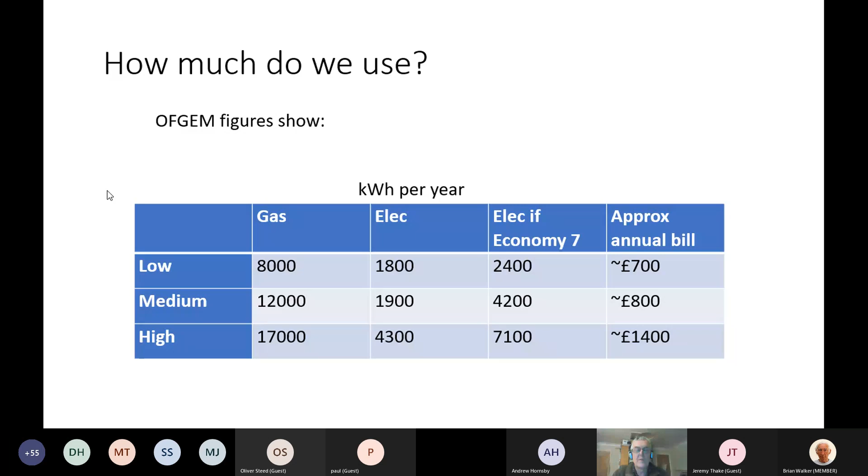Two things I want to say about this. One is that the gas kilowatt hour use is considerably more than the electricity use. And in the context of the current electricity supply and the generation mix we have in the UK, gas is also by far the more significant source of CO2. Because what has actually happened in my career in this sector is that the electricity generation mix has massively reduced the amount of CO2 emitted from electricity generation. So what that says is that if we're looking in the context of energy use and carbon, then it's about the gas use.

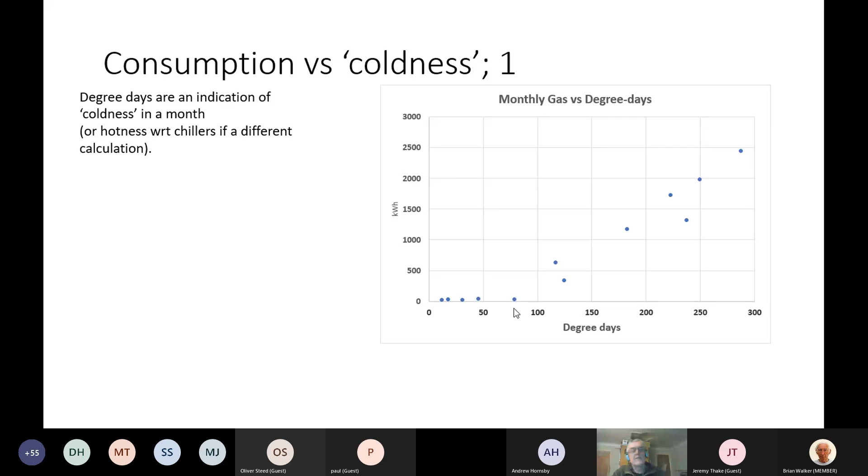So that hopefully will become more clear if I talk about what a degree day is. So this is how you calculate them, is the best way to explain it, I think. So step one, you choose a reference outside temperature. So what is outside your house, and typically we use a weather station number rather than necessarily recording the value directly outside the house. And the reference temperature is essentially the equilibrium temperature at which you don't need to heat the property. And for the UK, that's typically taken as 15.5 degrees centigrade.

So you take that reference, and then for every hour, you calculate the delta between that reference and the actual temperature. So, for example, if you're looking at heating degree days and it was 13.5 degrees outside, compared to your reference, you've now got 2. It being colder, so you record that 2, and then you go through all the hours in that period you're looking at, and you add up those degrees. And then, of course, what you've got immediately is degree hours, but then, with the relevant maths, simply dividing by hours or days, you can produce degree days for the day, the week, the month, or the year.

Now, that 15.5 degrees centigrade number is a good starting point as a reference, but actually it will probably vary according to how well insulated the house is, because if you insulate a house very well, it is isolated from the outside, and therefore it is likely to stay warmer by itself. We have in all our houses what are called incidental heat gains from, for example, when you boil the kettle, or from when you're watching the telly, or your lights are on. Even though they're low energy, there will still be a certain amount of heat going into the building. Even people and pets will produce a certain amount of heat.

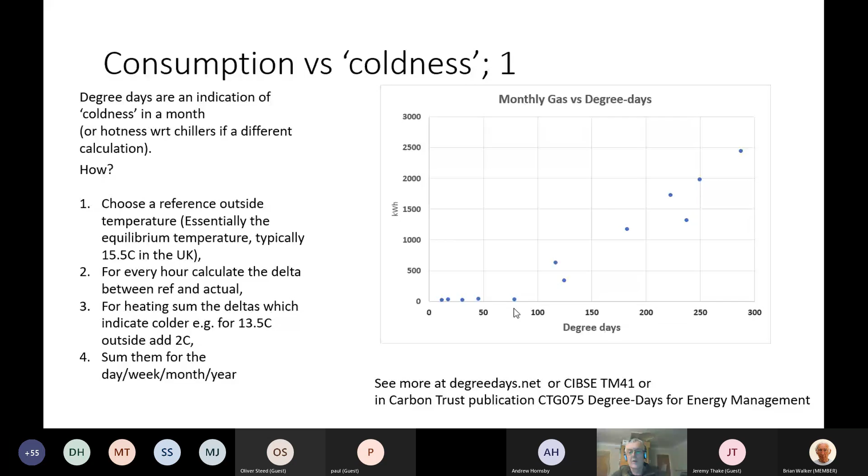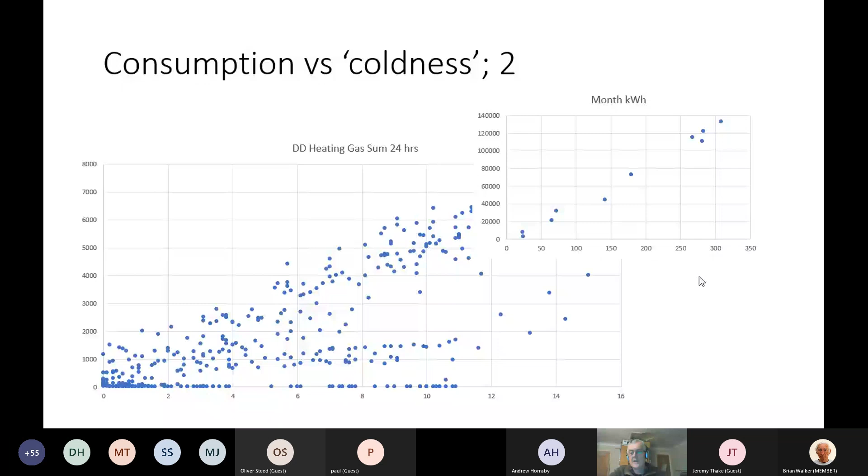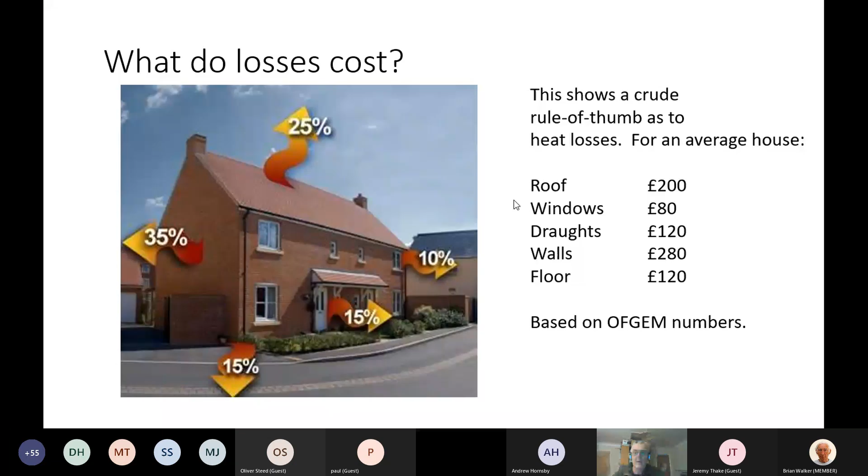So that was how much energy these houses use, and some idea of how we might analyze it and the costs. So what I now want to talk about is a bit more detail on how construction and the insulation will influence those numbers.

So to start with, I'm going to introduce this concept of U values, and many of you may know about this anyway, so apologies if this is not new to you, but it's the construction industry's shorthand for conduction. The units are watts per square meter per degree C. So what that is saying is, a watt of heating power is being lost through an element of the building for every square meter and for every delta T of a centigrade.

So it is actually a very good unit when you are designing a building to help thermal modeling and to understand how the structure could be improved. There are some shortcuts taken in it. So the U values that you get for a piece of a building are averages, regardless of, for example, wind speed.

Anyone who's worked on heat transfer as a mechanical engineer, you'll know that forced convection, so air moving at speed across a surface, removes much more heat than natural convection. And that must apply to buildings as well. So if it's a windy day, the U value must change. It must lose more heat than on a still day when it's just convective loss.

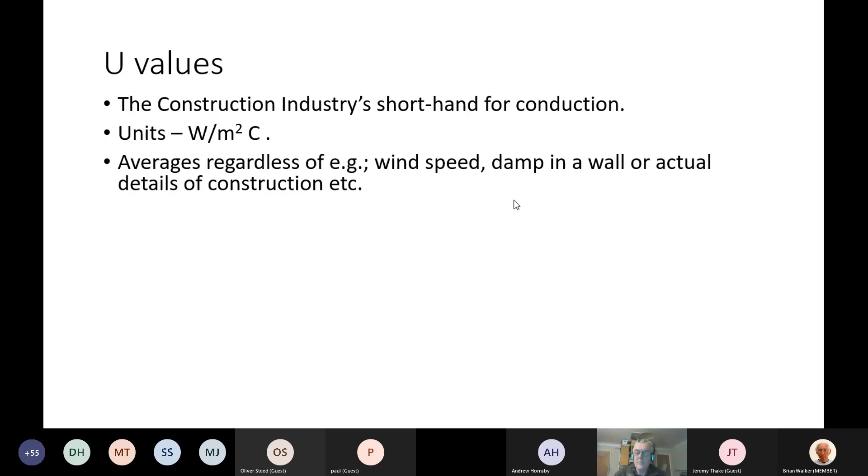So what sort of values do we get? This table is showing you, so each row is an element of the building, and you'll see on the left there I've got the wall, the floor, the roof, and a window. And then I've got a column which is the lower performance type of structure with its U value, and then a higher performance one and its U value on the right.

So if we work our way down the rows, a 4-inch brick wall, that's 4 inches thick, so that's one brick thick, and that might be something you would find in a Victorian building, the scullery, for example. A few houses just have a 4-inch brick wall. It might be that someone's converted the scullery into a utility room, and that's the thickness of the wall. So that U value is about 3 watts per square meter per centigrade.

A higher performance, right at the top end, passive house, which I'll talk about a bit later. So that's a really top end building, very high levels of insulation, very low energy use. So there we can get to 0.09, so a very substantial change. Let's see, 1/30th or better.

Then the floor, so the sort of worst case I would expect to see would be a suspended timber floor over a ventilated void, and typically again that might be Victorian, but we do see those even in houses up to about the 1960s, and there we're losing 1.5 watts per square meter centigrade. But a modern floor, which would typically be solid, but it can be a modern variation on suspended, which we call beam and block, you have insulation both around the perimeter and underneath it, and there your U value is 0.1, so again very substantially lower.

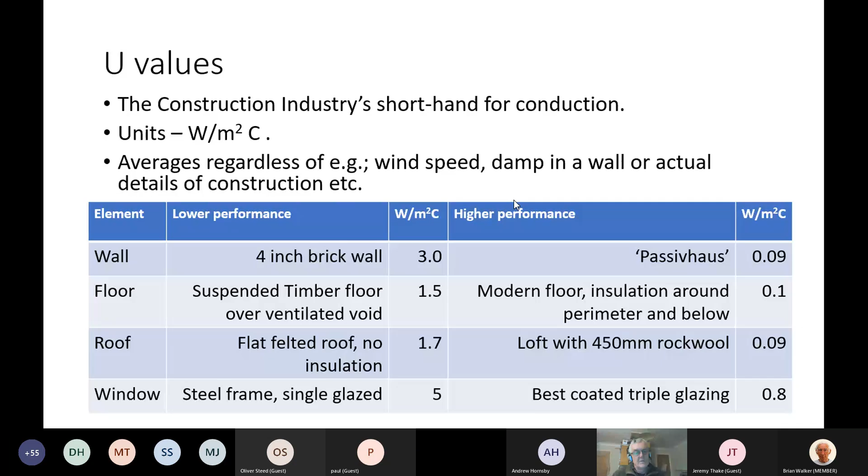The next question then is how might that build up to how a building is actually losing heat? Oh, sorry, before I do that, I've got one more element of heat loss, which I nearly forgot. Ventilation.

When cold air comes into a house, it must push warm air out, and of course we have to reheat that fresh air. So we have to consider those air changes, and the reason we have them is because inside a house you have sources of moisture, whether it's just breathing or showers or boiling that kettle or whatever.

We also have some pollutants from cooking. There are plastics in our house. If you have a new carpet, there's that new carpet smell, which is actually VOCs, and of course we have CO2 from people. If you didn't ventilate that, then the air quality inside the house would become unacceptable.

So as an indication, 1 air change per hour is about what we need to maintain a healthy environment. Slight caveat again, it will depend on how many people are in the building, what is going on, and how big a volume of air there is in a building, but that's a good indication. So as I say, we need to heat the air to maintain comfort.

And as an indication, if we had a 10 meter by 7.5 meter floor plan on a building and two stories, so 4.8 meters tall, that volume with a delta T of 15 centigrade, so 5 degrees centigrade air coming in, but we wanted 20, you need about 1.5 kilowatts continuously to keep that air up to temperature.

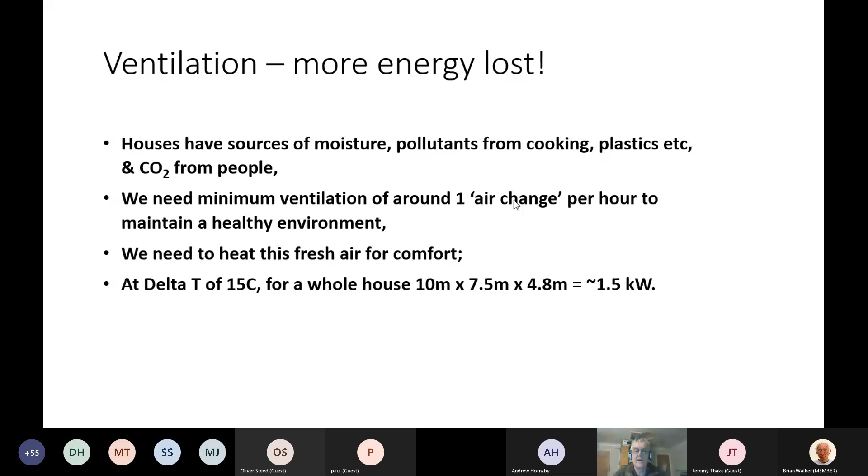So now I'll build that up into a typical house. And here we're building it up similar looking to the U value, but it's watts per centigrade, because now we've multiplied up by area. So this is telling us the sort of specific heat loss for a building. I've used that 75 square meter floor plan as an example, and this is considered the sort of nominal small average house in the UK.

So the fabric conduction losses, so we take all those U values, the U values of the windows, the walls, the floor, and so on. For each element, we multiply by the area, and then we get the totaled up watts per centigrade. For the air changes, we take the volume and the specific heat of air and the flow rate and so on, and then we get another number. Coincidentally, these are very similar. And then we total them up. Total specific heat loss for this building is 116 or so watts per centigrade.

And now you can see for 2 different delta T's, so one at 12 degrees centigrade, so if it was 6 degrees outside and 18 inside, we have 1.4 kilowatts required to keep the house comfortable at that 18. And if the delta T is 23 centigrade, so now we've got a frosty day outside and someone wants it at 22 inside, then we need 2.7 kilowatts.

To me, 2 things jump out straight away. One is that, of course, delta T is important, which is why, and hopefully this is no surprise, if you set your thermostat down a bit, you will save energy because you're reducing your delta T.

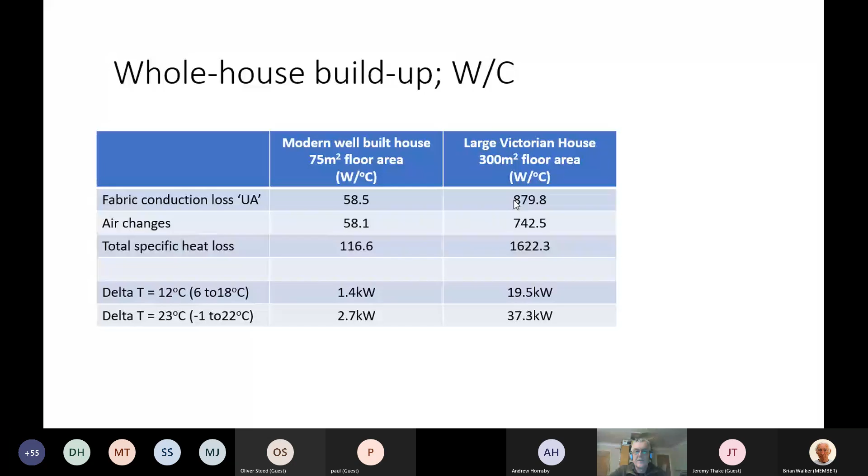Now, there's another way of looking at the sort of specific heat loss. So I'm now going to look at how those older building fabrics and older U values have changed and have improved and are going to improve in future. This is another industry convention where we're looking at watts per meter square of floor area. As an engineer, it makes me wince, but this is what the construction industry uses.

The particular problem with this is that per square meter of floor area doesn't differentiate between, say, a bungalow and a 2-story or even a 3-story building, when the surface area to volume ratio will change dramatically. But it is used as a comparison. There's a certain amount of benefit in using it.

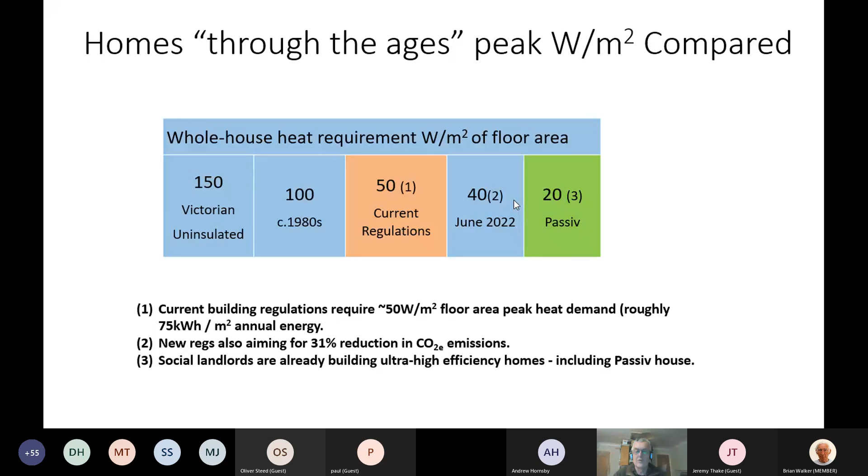So let's talk a little bit more about what are passive houses. I've got some photographs here, and then the bullets about what the specifics are. So first of all, they do have very high levels of insulation, and that simply means very thick insulation. And on the bottom photograph, I don't know how easily you can see on your screens, but it's just visible here how deep the reveal where the window is fitted is. And I know this particular house had 300 millimeters of a foam insulation on the outside of a heavy concrete structure.

The other thing that is done to passive houses is they are very airtight. And what that means is you have to have active ventilation, and that active ventilation will have a heat recovery system in it, so that as the warm air in winter is blown out to maintain freshness of the air inside, you bring in cool air, you pass it through a heat exchanger, and you swap as much of the heat as you can. And a good unit, well installed and operating at its correct settings, should achieve over 90% of heat recovery in an active ventilation system. The other thing you should have in a passive house is good thermal mass.

I mentioned the one at the bottom has a concrete structure as its internal surfaces. And the point about that good thermal mass is that it modulates and moderates temperature changes. The summer heat, for example, as the temperature outside rises, the house will gently absorb that heat. It won't suffer from overheating on a really hot day. The thermal mass will slowly absorb that heat.

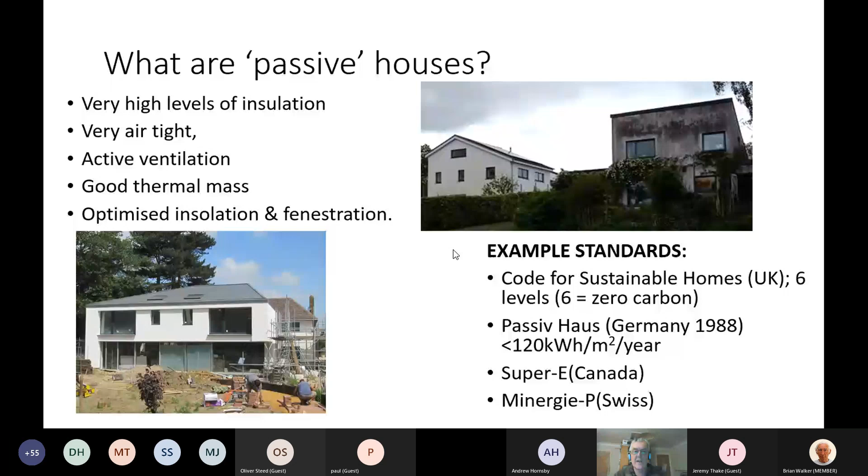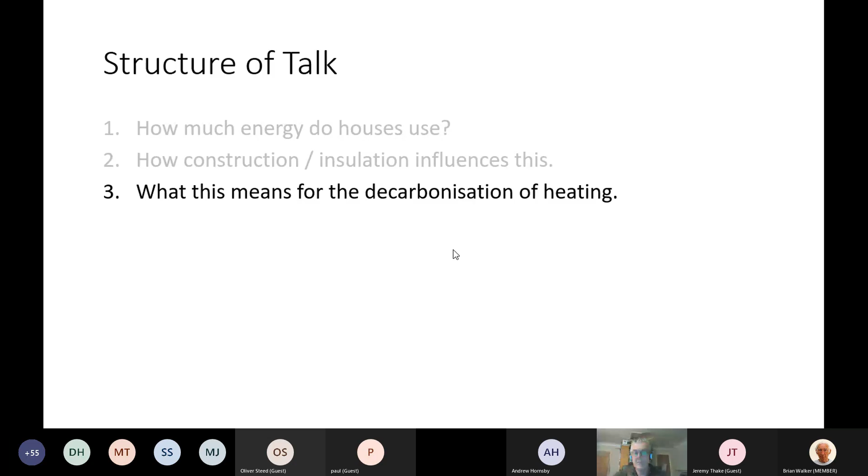So we looked at how much energy existing buildings use. We've looked at how we might change that by improving insulation. So the question I want to now talk about is, what does this mean for decarbonising heating? So let's look at what we currently use for heating, which is the red one, gas boiler. Why would we use it? Here's the pros in the next column.

Well, obviously, very high temperature output, which does two things for you. It means you can have quite small radiators, and it means you have a very fast warm-up. Suits conventional designs of houses. It suits a lot of modern living for people who may not be in the house during the day, and it's convenient. We're used to it. The other point, of course, is that the gas invisibly and magically just comes through a pipe into our houses, and we don't have to think about where the fuel is coming from. It just exists.

Then there's biomass. Similarly has high temperature output, which also means you can have small radiators and a fast warm-up. It is CO2 neutral if the fuel is sourced in the right way, so we've got a definite step change in how we might heat buildings. Then we have heat pumps. These are extremely efficient. For about a kilowatt of input, you will typically get 3 to 4 kilowatts of heat output. And this is why there is so much interest in them, and indeed there has been for many years in other countries.

An air source heat pump will typically give you 3 kilowatts out for 1 kilowatt in, and a ground source heat pump will give you 4 kilowatts out for a kilowatt in. There are some very robust and reliable designs out there. And of course, if we're using renewable or certainly low carbon electricity, then we get an extra boost of extremely low carbon heat, because the heat source for the pumps is the natural warmth around us. So an air source heat pump extracts it from the atmosphere. A ground source heat pump, as it says, extracts it from the ground.

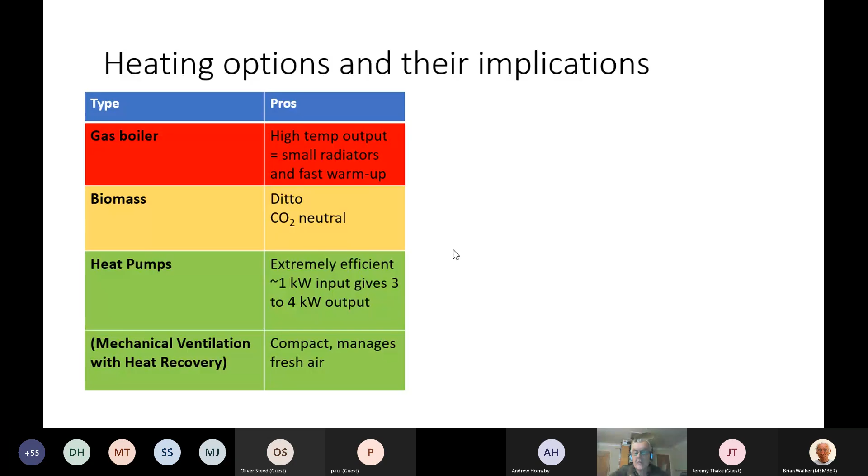So what are the disadvantages? Well, gas boiler, CO2 emissions, and of course UK sourced natural gas is declining, and that is partly why we are exposed to this ridiculous spike in gas prices at the moment. We are no longer a net exporter of gas.

Biomass, well, there are two problems really with this. One is the lack of scale of the fuel resources in the UK. We just don't have enough waste wood and other materials that could be used. And then the other big issue is transport. I think it would be unthinkable actually to try to supply some of London using biomass, because the amount of fuel you'd have to transport is colossal. Indeed, it's quite an eye-opener.

Some of the clients I've worked for who are building new low-carbon houses or retrofitting biomass to their houses where they've had oil before, it's an eye-opener to understand just what volume of biomass you need, especially if you've converted from gas, where you didn't have to think about where the fuel was coming from, and suddenly you've now got, say, 4 cubic meters of storage, and that isn't your whole fuel consumption for the year. So the transport of that would be quite difficult.

So, difficulty with heat pumps, then, moving down. They are electrically powered. Well, that in itself isn't a difficulty, but in the UK, that means we will need much more electricity generation to flip from using gas for heating to heat pumps for heating. And also, if we don't get this right, we might need grid reinforcement, because the power rating of some heat pumps will be so high that it might just put too much demand on the grid.

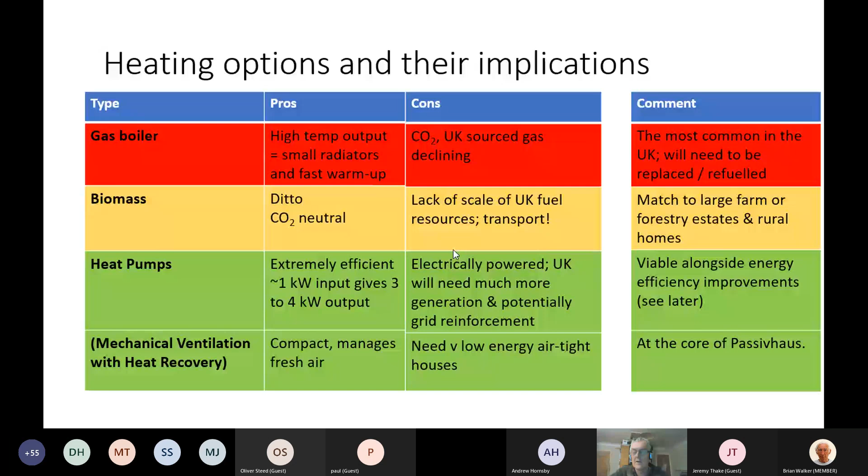Heat pumps, where do they fit, and where might these other technologies work? I'll try to explain. This is where it does get quite complicated. So here I'm trying to compare the kilowatt peak heat requirement of homes and to see whether they might be what I'm calling heat pump ready. So this chart tries to illustrate how the peak heating demand, and that's essentially the rating of your heating system, how that varies depending on the size and the insulation levels of the building.

So down the bottom here, this is the insulation quality, if you like, of a building. This level is the uninsulated, the old Victorian rectory again, that's getting such a bad press at the moment. And at this side we've got the passive house level, and in between we've got the different stages of improvement in building regulations.

And then as we go upward, we'll see these lines are telling us where the thresholds of the floor areas are. So this is your middling small house. Here's a bigger property, and there again is our much maligned Victorian rectory.

And what we have in here, these 3 bands, are different qualities, if you like, of the amount of heat. So down here in our very small or certainly passive house insulated levels, we have no heating required. So even here, even older buildings, if it's an older apartment, it might be small enough that you could just retrofit a heat pump.

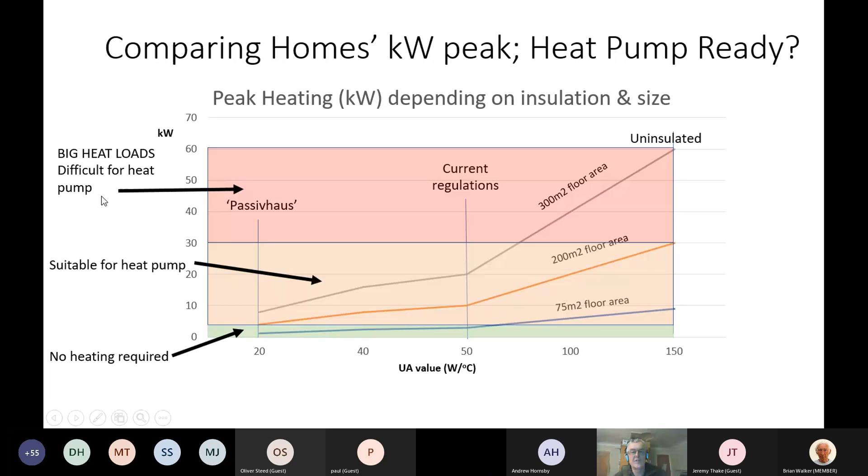So what are the implications for new build houses if we're looking at heat pumps? And I think they are an opportunity for heat pumps. So first of all, very simply, U values should be much better. The air tightness should be much better, and then we fit mechanical ventilation with heat recovery. There are techniques for testing buildings as they're constructed to make sure that they are made airtight, and there are levels which can be certified at which there's no problem with a mechanical ventilation with heat recovery.

I would say we need to go ultra low energy, such as passive house, and I've already said there are some, certainly self-builders, but also some registered social landlords are building at passive house level. So it's not impossible by any means, and it's proving practical if social landlords are doing it. The flip side is that at this point here, it's difficult to use traditional brick and block to get to such low energy levels and such good air tightness that you can realistically think of a heat pump.

It's partly because of the way the construction industry operates, but it's also partly because of the constraints on it. You're working in a field in all weathers. The work is done under time pressure. Quality is only really seen at the very final finishes with the paintwork and the final plaster levels. So to be frank, there's a lot of corners cut in brick and block.

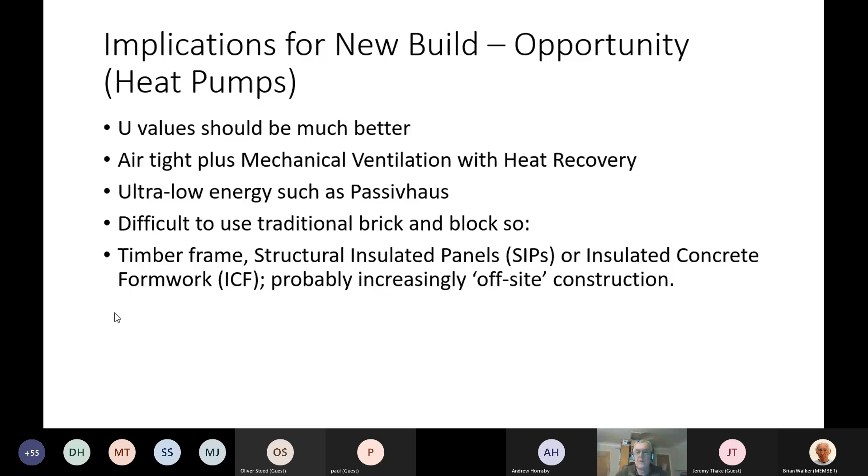And we're beginning to see a shift to off-site construction in some sectors already. The passive houses that registered social landlords are using are typically off-site construction. Some of them to the extent that they even build the whole of the ground floor, and that's in the factory, brought in on the lorry. It's already got the electrical wiring fitted and the plumbing. It's connected together as you build the second floor on top of it and so on. So quite substantial changes occurring there.

What about existing homes? There are some specifics that we would need to do. One of them, which is often overlooked, is you'd need to install an appropriate hot water tank if you're going for the heat pump solution. And the reason for that is that a heat pump produces output at a lower temperature, and indeed maybe they should be called warmth pumps. Typically the output will be about 45 centigrade, 40 to 45, and that's because of the thermodynamic cycle they're using. They retain their high efficiency by keeping the output low.

What that means is you need a different heat exchanger in the tank compared to a gas boiler. It also means you need a much bigger tank, because if you can think of how you might have a shower now, certainly from a combi boiler, you get hot water, you dilute it with cold to get the right temperature. If you've got a classic immersion tank, again, the water can be very hot. You can dilute it with cold, but not use very much of the hot tank. When your tank is only 45 centigrade, you're going to use a much larger volume of that water. So you need a bigger tank.

I don't often hear that being mentioned when we talk about heat pumps as a retrofit for existing buildings. And I think it's an area which will actually cause some confusion, and also potentially it's a barrier, because where people have a combi boiler in their houses, they don't have a hot water tank. So where are they going to put it?

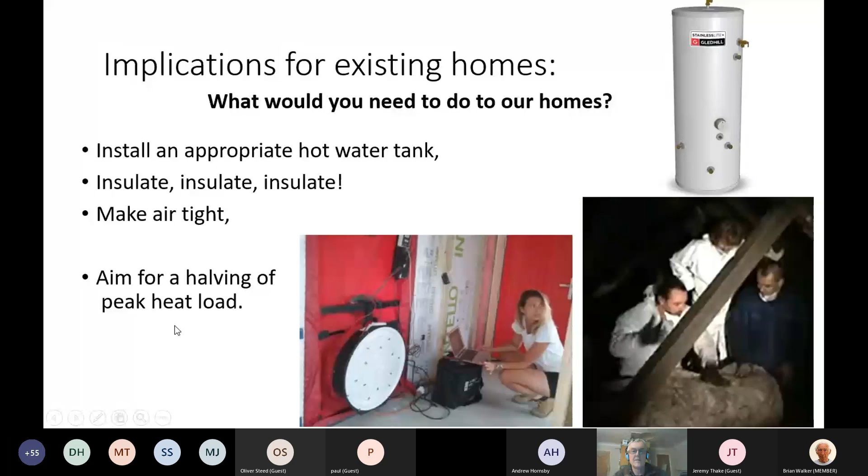And it's a very effective test in a new build, typically done twice during the construction, each time taking maybe a couple of hours, go around, find the holes, seal them up, and then return later when the next stage of construction is done. And we can get some very airtight buildings like that. And I would say for existing buildings, we should aim for roughly halving the peak heat load. I think that's a practical level to go for if you use all these various techniques.

Now, I spend quite a lot of my time talking to ordinary people, non-technical people who don't have a particular carbon target in mind, and working at the moment, in fact, for a community group in North Oxford. And something that also we should not overlook is the barriers to change. I've talked so far very much about the dry technical stuff and what can be done, but let's look at some of these barriers. This one, and I'd written this quite a while before the big increases of gas prices we've seen: high fuel bills, no spare capital. People are suffering cost of living increases. Where are they going to get the money from to do all this work?

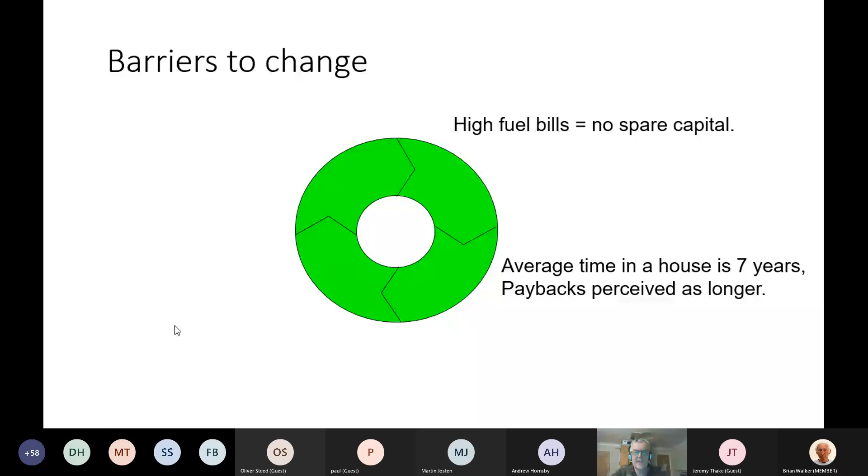The average time in a house is typically 7 years still, so the paybacks need to be less than that, but they're perceived as longer. They're not necessarily longer, but they're perceived as longer. And I think if you look at the current massive increases in energy prices, actually, if you'd done some energy efficiency work a couple of years ago, you'd be laughing, because your payback would just have been reduced by about 3 or 4 years. But they are perceived as longer. And actually, people perceive that their time in the house will be less than 7 years, and that's not always the case either, but it's a barrier.

There's a perceived lack of credible suppliers and installers, and in fact, I think there are some incredible suppliers and installers. And every now and then we get problems like Grenfell Tower, where that dreadful disaster was caused by lack of quality control in the whole process, in my view. How can you put such flammable insulating material outside a building? That has influenced the way people look at external wall insulation. There are, to be frank, deliberately mixed messages in the media from the energy industry. Why would British Gas want you to buy less gas, I ask myself, by insulating your house?

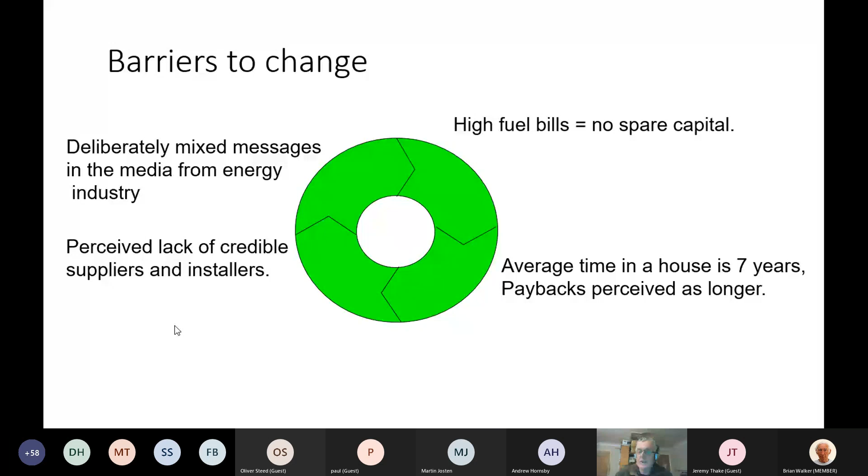Busy family life, people don't have time to think about it. It's quite complex to go through the process of finding a company to do the work. What is the work you want done? How much is it going to cost? Is it going to pay back? And so on and so on. People just don't have the time to think about it. Risk, suspicion, and doubt generally.

Inconsistent government policy, and there are many disincentives, is another one. We've had the Green Deal, which was cut about 8 years ago. It was replaced briefly by another home insulation process, which turned out to be too complicated, run by a call center based in America, and has just collapsed into nothing. We don't have a replacement. We used to have a feed-in tariff on solar PV. We used to have a renewable heat incentive on heat pumps. They've gone. These things come and go all the time, so it's very difficult for people to believe that there's going to be ongoing support.

And then there are disincentives. For example, a new build property doesn't require VAT to be paid on it, but if you're improving your home, you have to pay a lot of VAT on the materials that you're using and the work that's being done, unless you want to go through an incredibly complicated bureaucratic process. So yes, another disincentive. And then there's just general peer pressure, the sense, I think, that a lot of people would rather have a nice new car or a brand new kitchen because they feel that that's what their friends and neighbours, and that's what Facebook, would be telling them they should be doing.

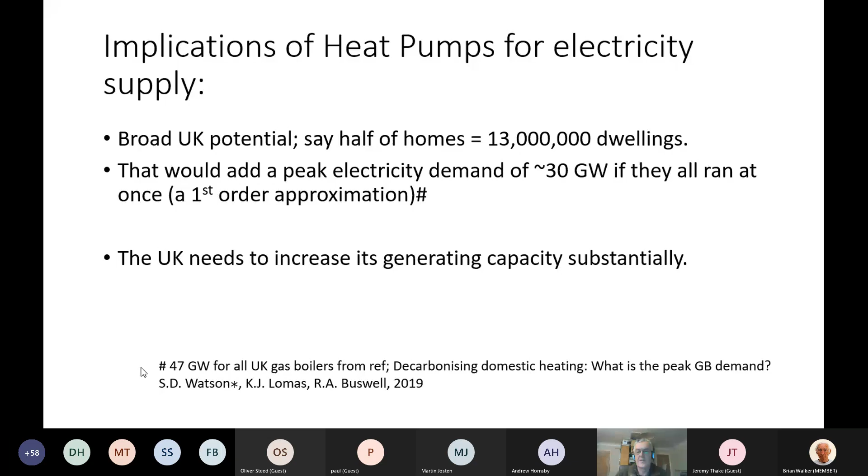So, in summary, I would say that many UK homes are heat pump ready, or can be made so by practical energy efficiency improvements, and that would give us an instant decarbonisation.

If you did just the energy efficiency improvements, say halving the heat loss, then that reduces primary energy consumption by about 50%. Using the heat pumps, and remember that you put a kilowatt in and you get 3 kilowatts out for an air source, or better for a ground source. So that means that we will reduce the primary energy for heating our homes down to only 18% of what we use now. But that will still use a lot more electricity, so we will still need some more electricity generation. And it is actually going to be a huge infrastructure improvement task.

And I remember as a teenager watching North Sea gas being retrofitted, or the burners being retrofitted to boilers and cookers in the homes of the UK, and it was a monumental task. It took years and years and years. That's the sort of scale of task we're talking about here. But of course, if the price of gas continues to rise, it will become, I believe, the most economically viable choice.